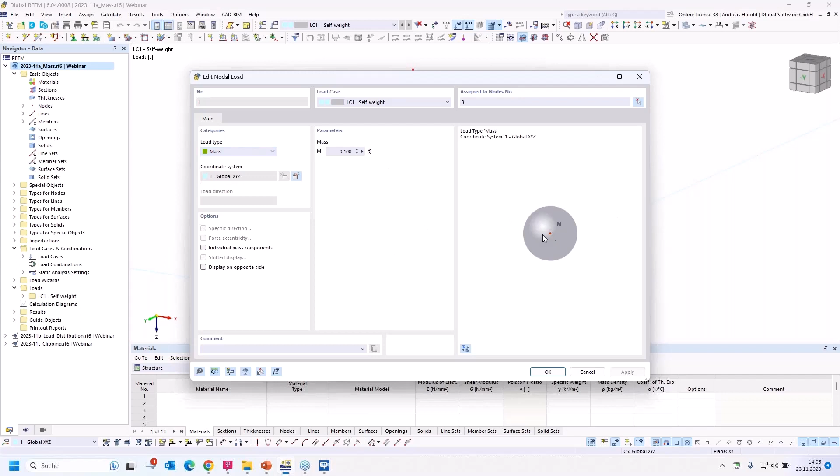Okay, I prepared that model with a rigid column and the mass load. The rigid beam hasn't got any load, as most of you know, and mass is a category of a load type. Usually you use force, but for example for a dynamic analysis, the mass load type is often used. If I click to the results, you can see there is no support reaction.

In the navigator results, you can see it's checked on, and you can also see there are no loads. In the table, if I go to static analysis, there are no support forces. How can you solve that?

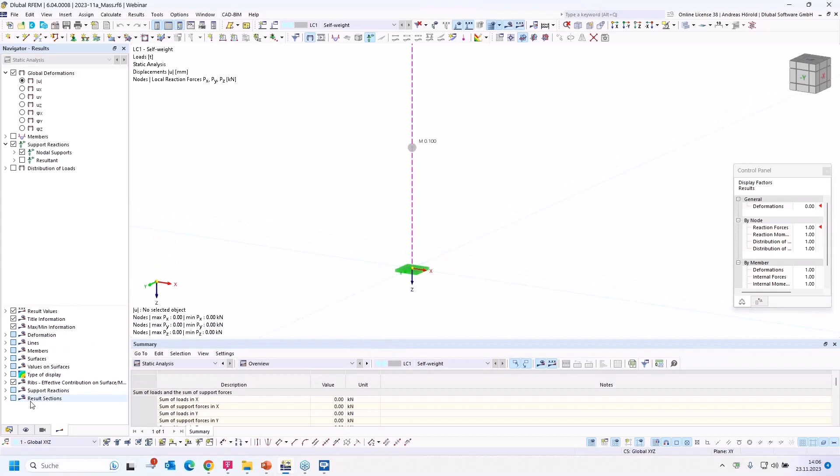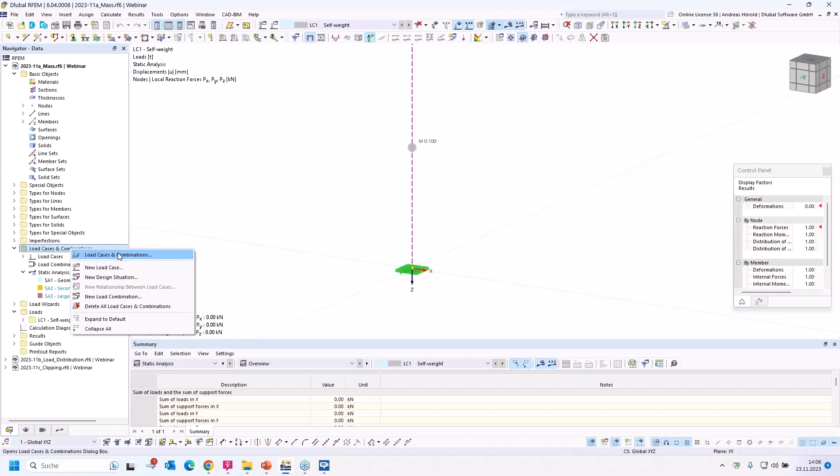You need to go left at the bottom. I switch to the navigator data, and I need to open the static analysis settings. Either you click with the right mouse and click edit, or you can also find it under load cases and combinations, also with right click. Then you see in the load cases the static analysis settings.

That's the same topic. If you click the edit button, you turn to this sub-dialog, and in the basic settings, where is this check? If you activate the mass, the masses will be converted into loads, with that factor in Z direction, 1 times. You can also press this button to switch between the vector and the acceleration.

Now you can see the acceleration of 10 meters per square second. The usual acceleration due to gravity is 9.81, and that value is rounded up by the program.

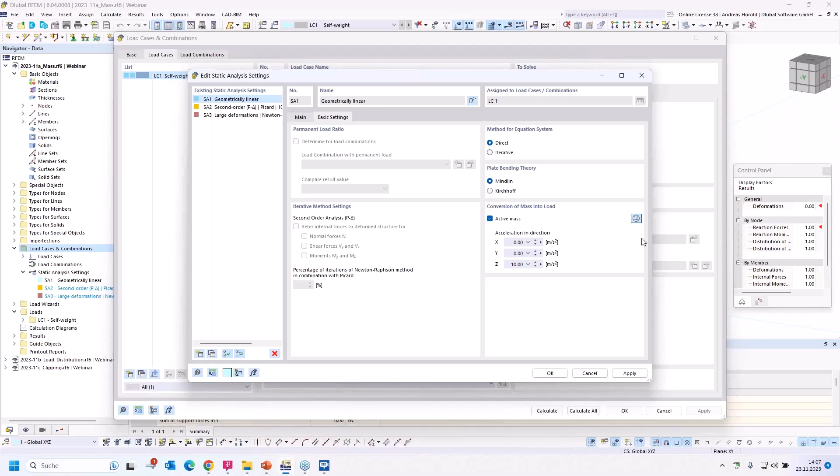Okay, now it's activated. I can click OK and calculate the self-weight load case, and now we should see a support reaction. Okay, now you can see it: 0.1 tons is 1 kilonewton. Okay, that was the first hint and the first question.

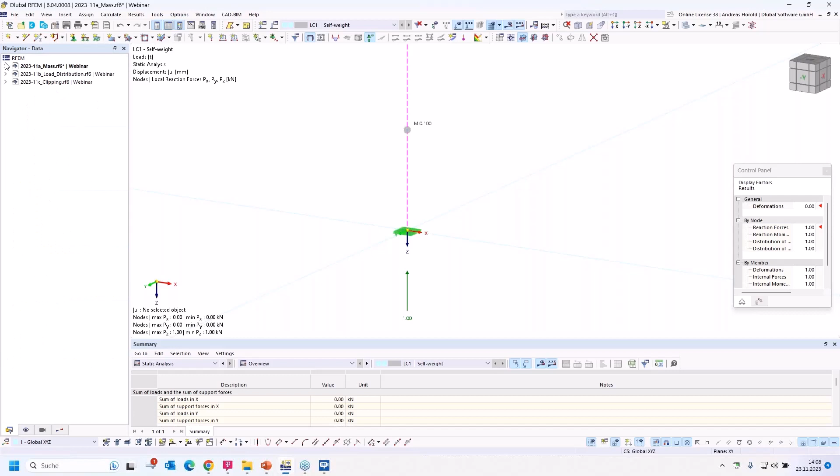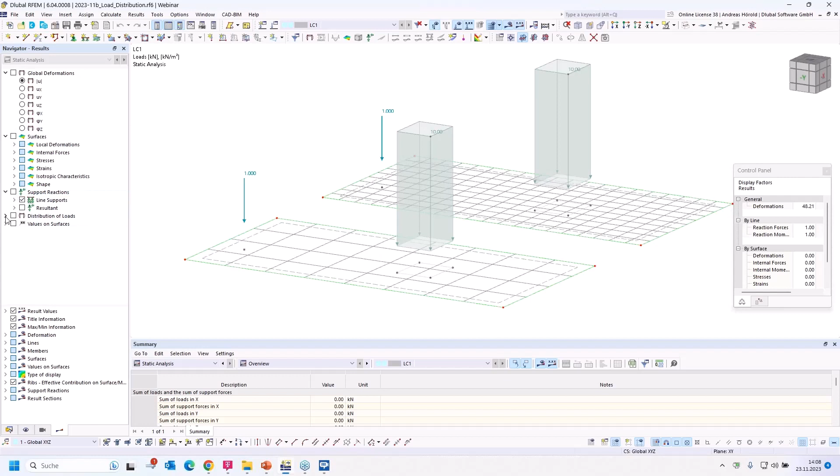I turn to the next model and the next question: how can I display the load distribution in the results of the static analysis? You can see that in the navigator results, left at the bottom, where is this check for distribution of loads. If I check this, you can see the load distribution.

The load distribution represents the load that is actually applied on the structural system at the FE mesh points, and if applicable on the FE areas. The FE mesh size plays an important role. You can see there are two models that are equal, and also the loads are equal, but there are two different FE mesh sizes. I can show that when I go above to mesh settings.

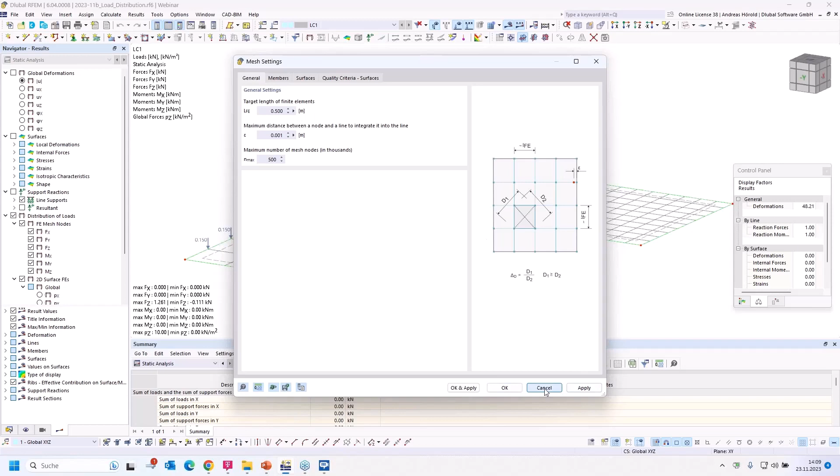That's the standard mesh setting, 50 centimeters. That's this surface, and if I click on it, you can see I've defined a mesh refinement. If I switch to that dialog, you can see the mesh refinement, 0.2 meters, 20 centimeters.

You can see in the different models and the different load distributions that in this model, the load distribution area is larger. And sometimes that can have an influence on the results.

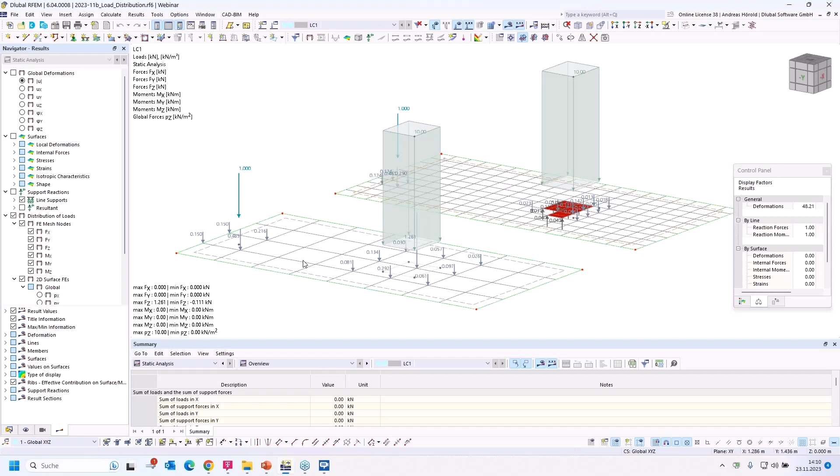Let me check the support reactions. I'll turn it a little bit. You can see there are different values, 0.74, 0.63, or if I rotate the model, the highest value, 0.7. This is 1.0.

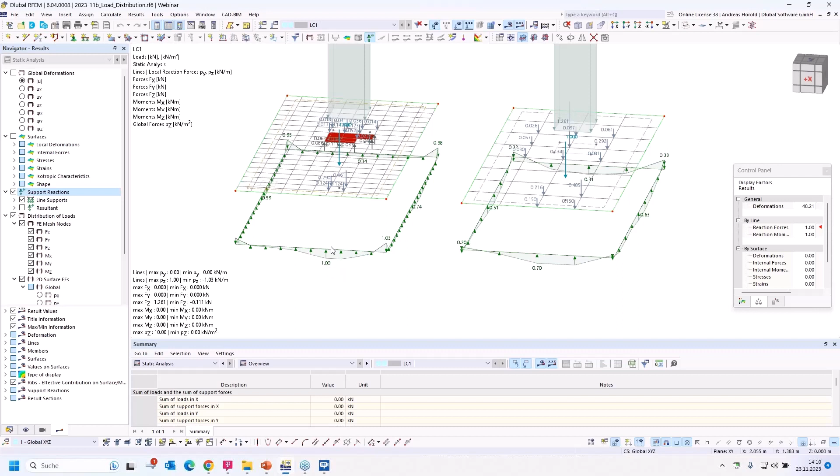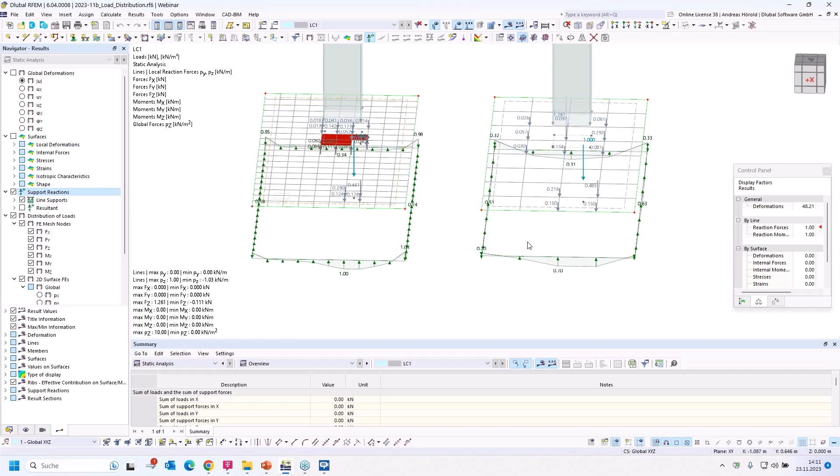The loads are not very high, that's why the difference is not too large, but that can really influence your results. Imagine there's a horizontal beam over an opening or something like that — the applying of the load should be correct.

Maybe you ask, what is the best FE mesh size? We can't say that. We can only say the FE mesh should be as large as possible, but as fine as necessary. There isn't any specific value that we can suggest.

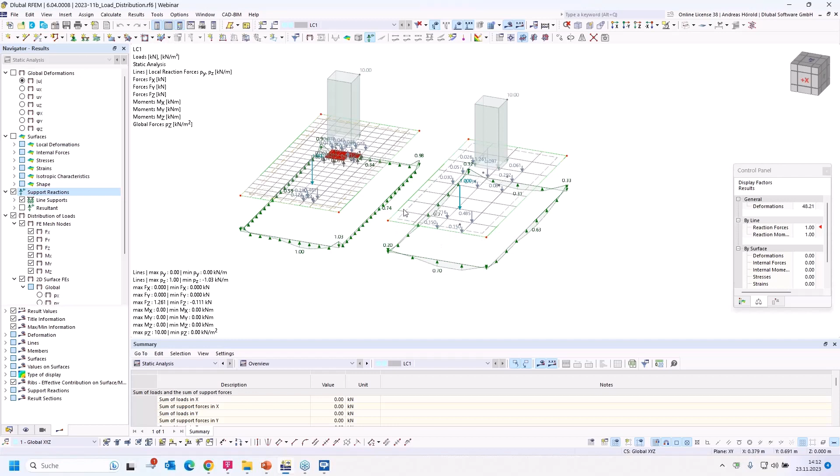When you have a surface load that loads the complete surface, you will see no difference or only a small difference in the results. But for examples like this, when you have a horizontal beam nearby, that can influence the results. You must test it. With that setting, you can display the distribution of loads and also the support reactions.

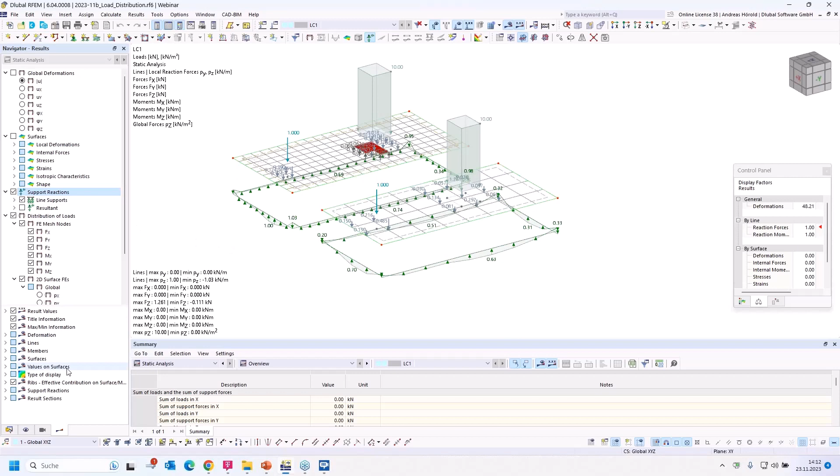Okay, then I turn to the next example, the next model and the next question. The question is: I have used a clipping plane in my model, and the hidden areas are still shown as transparent in the display. How can I completely hide them?

Let me switch on the guide objects, the clipping plane. You can see the clipping planes here. The default setting — I'll increase it a little bit — gives you three areas as default. They are created by default and you only need to activate them.

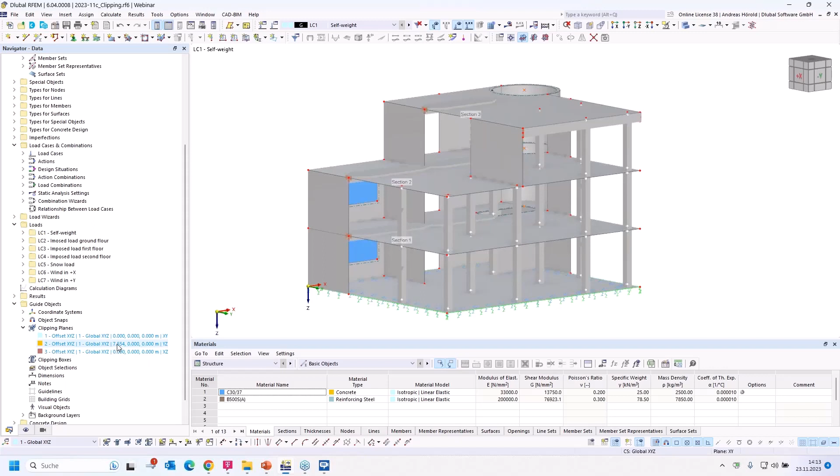Let me turn on a clipping plane. You can move the clipping plane. And you can see there is a transparent area. The question was, how can we completely hide this?

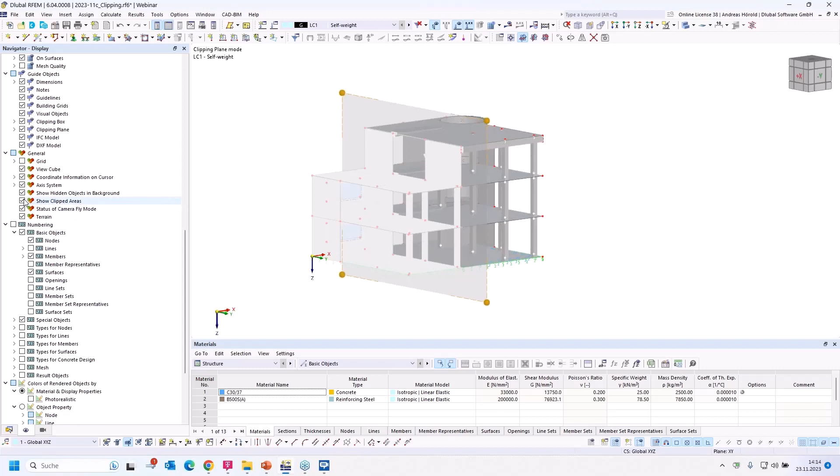We turn to the navigator display here at the bottom, then in the general settings, there's this checkbox, 'show clipped areas'. When I switch it off, you can take a look at the model, and that's quite better if you want.

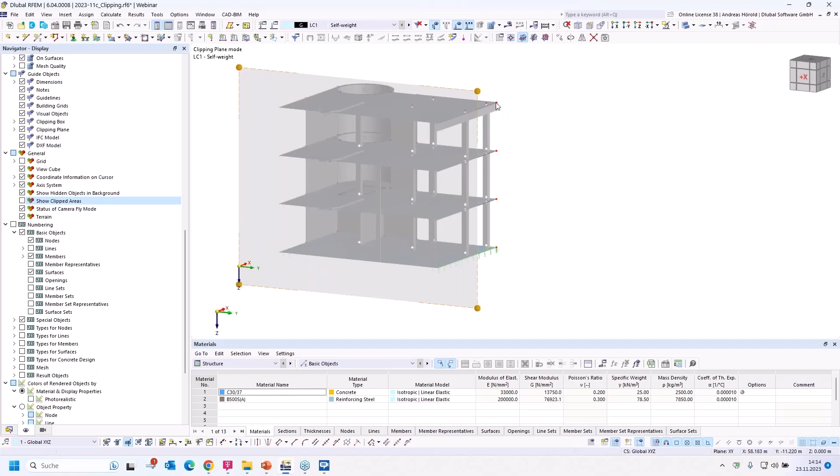That's the difference. If you want to modify this area of the clipping plane, you can right-click on this edge, for example, and turn to the display properties. I'll move it a little bit on this side, and you can change that value, for example 0.1, apply, and you can see the difference, 0.9, apply. Okay.

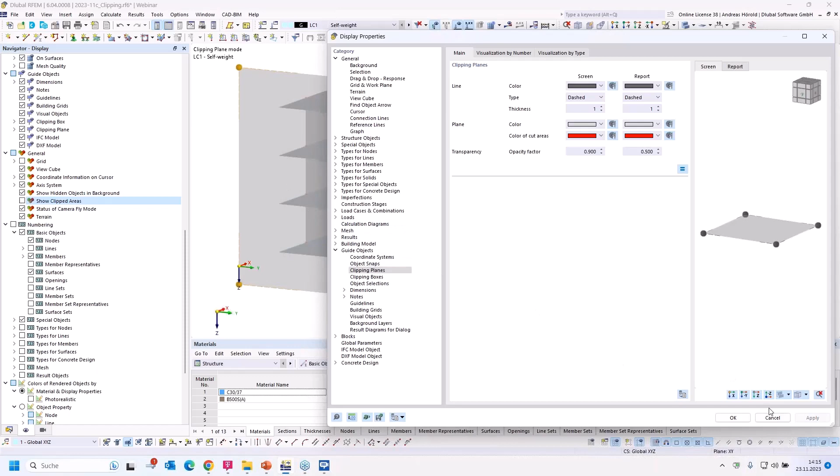There's another feature, 'show hidden objects in background', and it's not the same feature as 'show clipped areas'. When you select one column, then hide selected objects, you can see they appear gray. If you want to hide them completely, just uncheck this option.

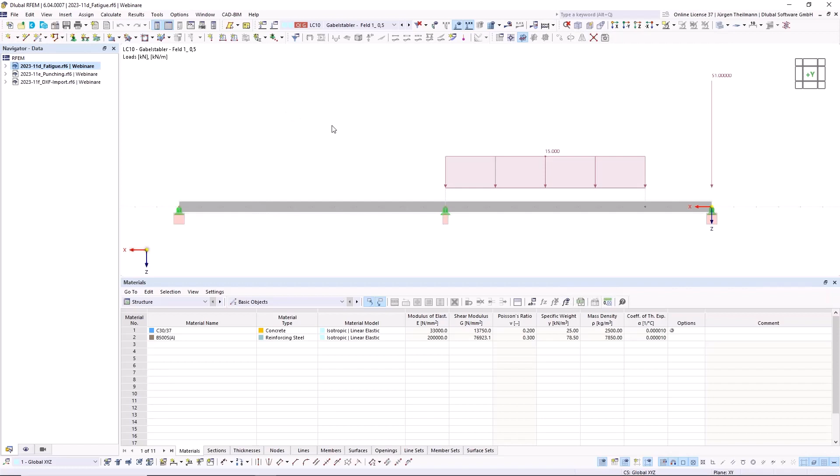This is a simple model — let me collapse the tables a bit so you can see it. This is a member model, but you can also perform the fatigue design on surface models. This is a kind of traffic route, a ceiling in, let's say, some kind of factory where you have traffic from forklifts driving around. You can see in the load cases that this is a kind of moving load from a forklift which is driving along this member right now.

This leads me to the next question: where do I need the fatigue design? It's mainly developed for bridge design, but as I said, other traffic routes, and maybe rainwater basins with traffic around. Generally, fatigue design is needed for structures where you have a lot of load alternations with load cycles of 1 million or more. Then you may need to perform this fatigue design check.

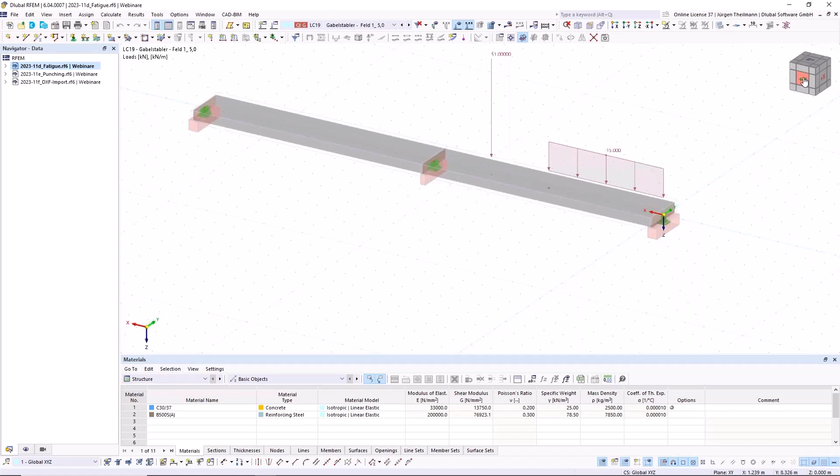So what do you need to do this? I'll expand my table a bit to show you in the concrete design add-on how you can switch on this fatigue design. First, there's a button with an earth globe and a small cogwheel - this is for the global settings of our add-on. In the ultimate design configurations, you can activate the fatigue design, which is the first thing you need to do.

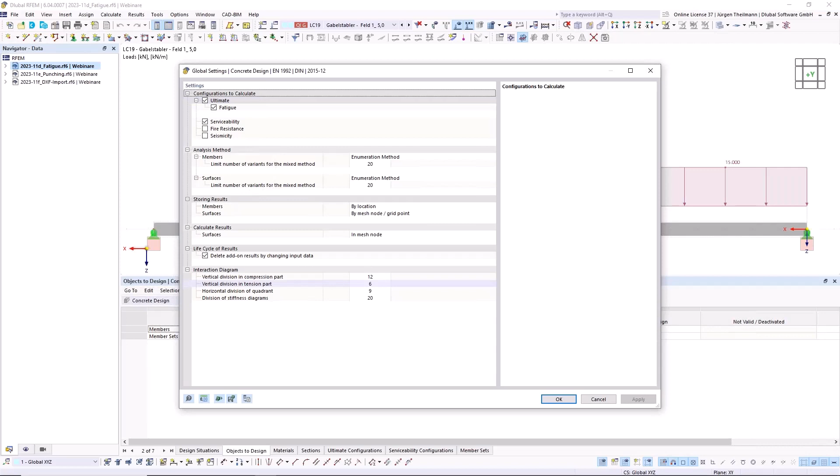Then I say OK, and now I go to the ultimate configurations. There you have a new tab for fatigue. In RFEM, you're now able to perform two ways for fatigue design: level 1 and level 2 from Eurocode. Level 1 is a simplified method. Level 2, as you can read, is for damage of equivalent stress range, and you can make some modifications there too.

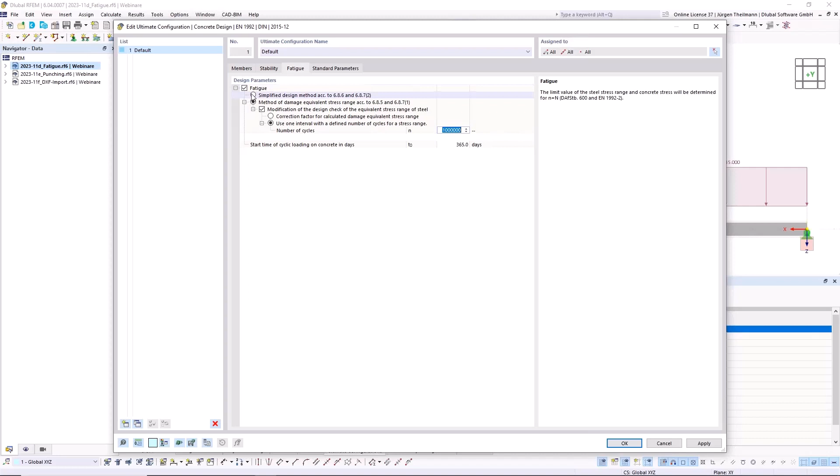I click that - you can use a correction factor lambda s, which is from bridge building. If you're from bridge building in your daily work, you know what this means and can edit it accordingly. Otherwise, you can use an interval of a defined number of cycles for your load alternations, which is set to 1 million by standard, but you can edit another value as needed for your project.

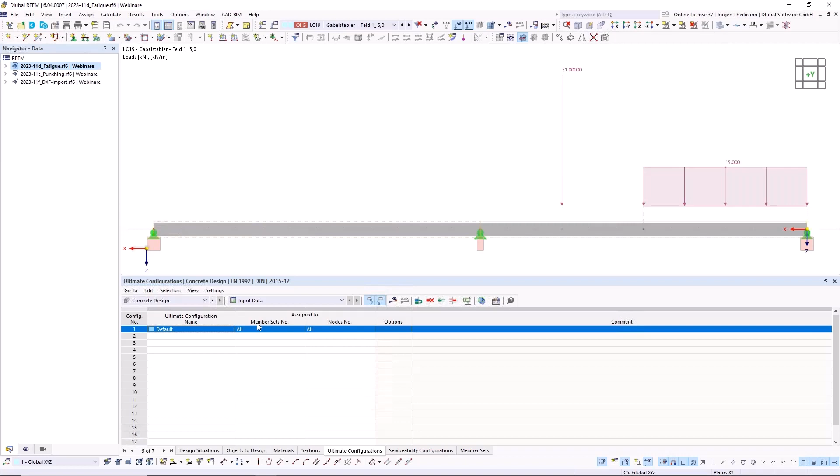So I switch this back to the level 1 design and switch off this setting. That's the second thing to consider. The third thing is, because we're dealing with load alternations, you need a design situation where you have these alternations in it - that's why it's best to have at least one result combination in your loads. So I go to the top where I have my load cases and open the dialog for my load cases and combinations.

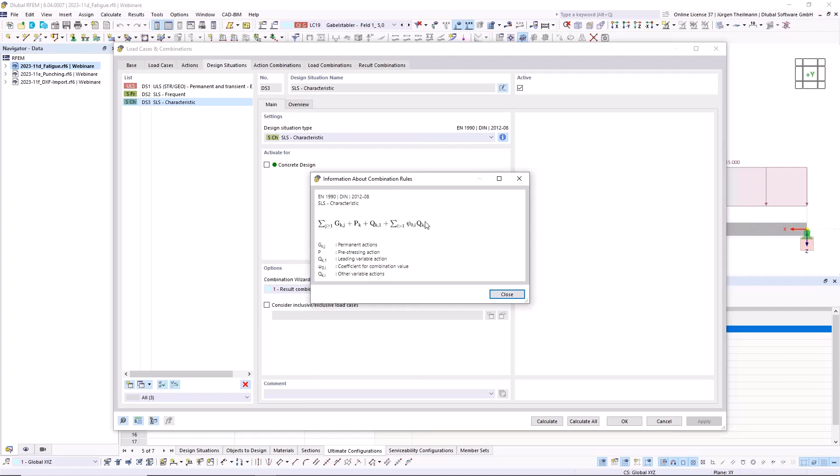Now I have 3 design situations in this model. First is the normal ULS design situation. Then I have the serviceability check frequent - this is for my level 1 fatigue design. For the level 2 fatigue design, we would need another design situation with other factors considered. Our development is right now working on bringing this design situation type into the program.

Unfortunately it's not 100% ready now, but that's not a problem - you can always build your result combinations manually. In our example today, it's sufficient that I use the SLS characteristic for our level 2, but this is just for this example.

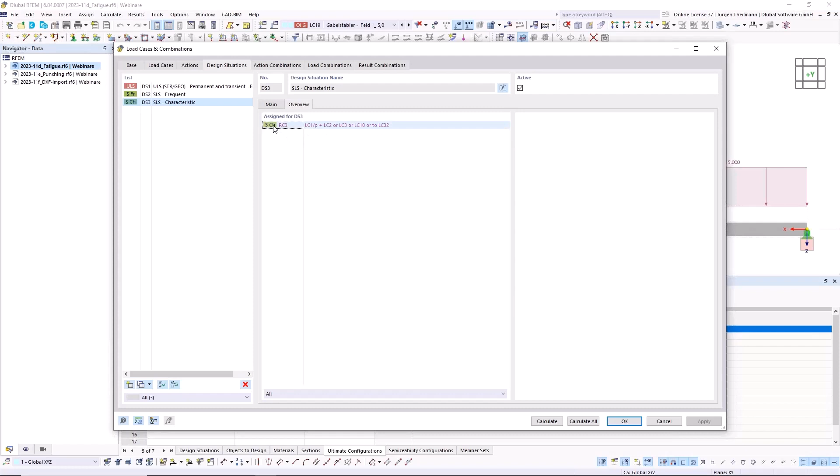Later on, you'll find the matching design situation type for that level 2 fatigue design check here. When I go to the overview of my design situations, you can see right now that I have result combination 3 for my level 2 fatigue design and result combination 2 for my level 1 fatigue design.

Okay, let's go back to OK. I go into the table for design situation, and now you could easily say, okay, I calculate all my design situations, but I just want to show you - right now we're doing level 1 and then we're doing level 2. It wouldn't make a difference to have both activated because the program will only perform the fatigue design according to the level we chose in our ultimate configurations.

Now I deactivate this DS3 once again, and I'll show you the level 1. I'll add a comment so there's no confusion. For the level 1 design check, we have the basic design situation type SLS frequent, and now we need to change this to the ULS fatigue non-cyclic. So that's the one we need for level 1.

I start the calculation, and you can now see that the program is running all the load cases simultaneously, all at once. And now it's performing the concrete design.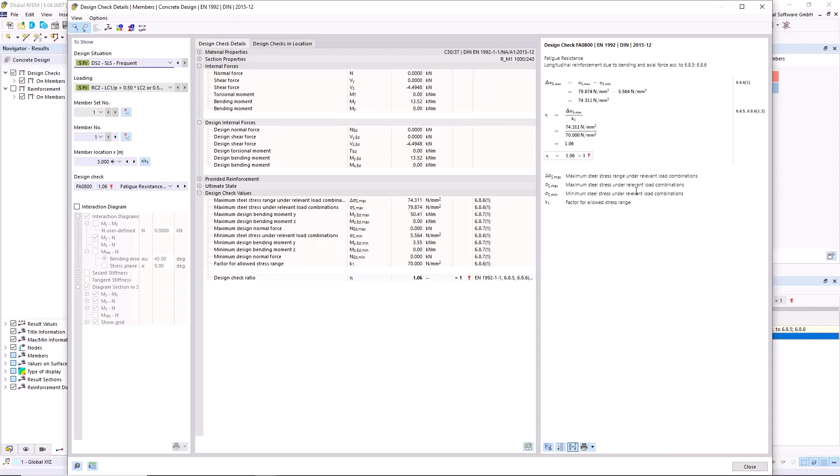Another thing I want to show you, now we have a factor of 1.06. It's almost fulfilled, but not entirely. I have done the result combination for the level 2 design check, and this is why I will show this to you.

Go back to my input data. I deactivate this design situation and activate the other one for level 2. Like I said before, if I calculate now, there will be no fatigue design check performed because I still have to activate level 2 in the ultimate configurations. So that's what I do now. Say OK and calculate again.

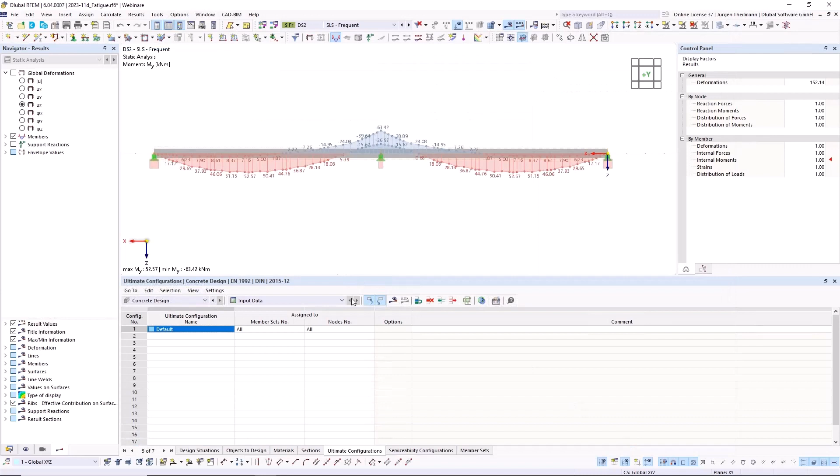You see all the load cases are still calculated. The program starts with the concrete design check. Now you see, we have invested a little bit more of computational power, and now we're a little bit better for our fatigue resistance. Still not fulfilled, but as I said, that's up to you. That's the work you will have to do further on.

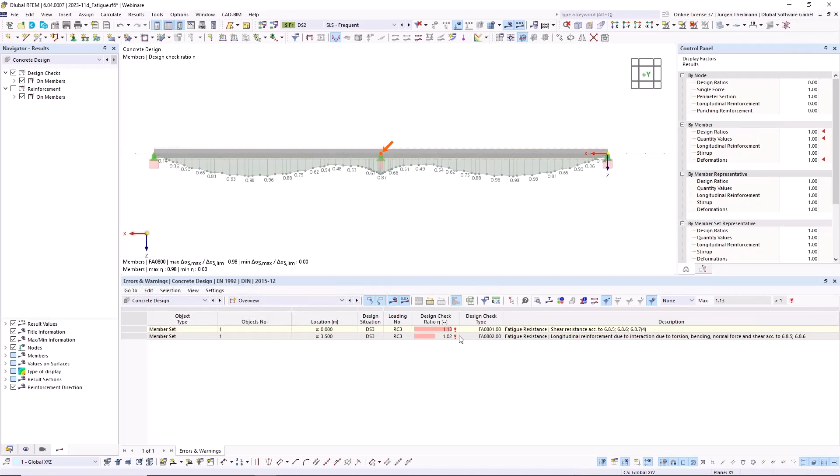As a summary, this has been a lot of information right now. We have 4 points we need to consider. First is in our global settings for the add-on, we have to activate the fatigue design. Second, in the ultimate configurations, we have to choose the level of design check we want to perform. Third, we need the correct design situation and change to it for fatigue. And the fourth point is that in those design situations, we need at least one result combination.

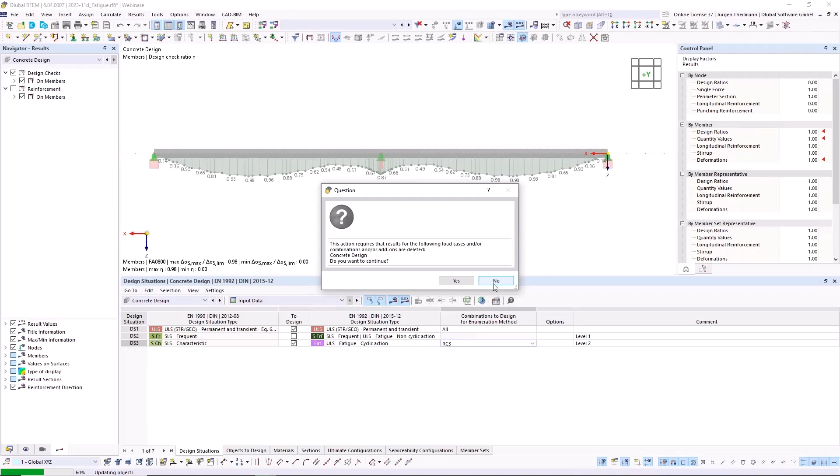If you need further information on this fatigue design, I will jump to our website because there's a very good technical article. You go to www.dlubal.com. You hover over support and learning with your mouse, and then you go down to support and knowledge base. Now, because it's our newest one, you can see the fatigue design according to Eurocode 2 in RFEM 6.

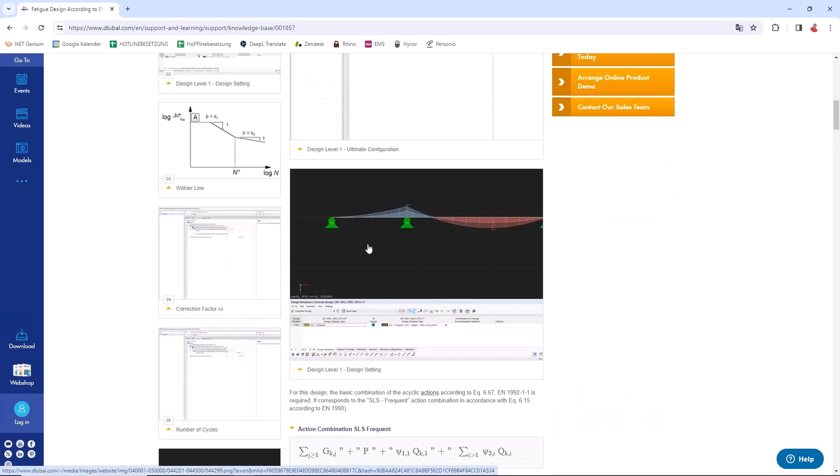As we go further on, there will be newer articles coming out every week. So you can go to full text and search for fatigue, and then you will find this technical article. If it was a bit too much for right now to get into your head, you can always go back here to our knowledge base and read all the details about this fatigue design checks.

Good, that's all for our fourth question today.

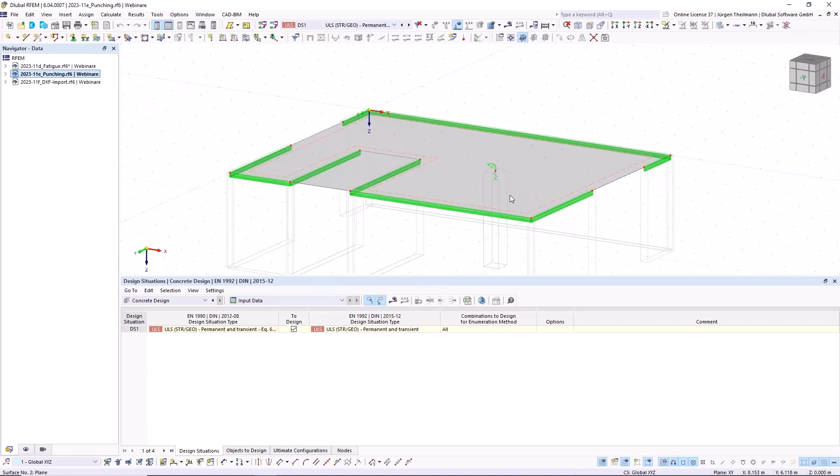And now I have the fifth one, which is a very general question about punching design, which says: I have a reinforced concrete plate or slab which has several nodes for the punching design. Some of them are wall ends. However, the program doesn't carry out the punching design check for all of those nodes. What is the reason for this? So I have a small model here.

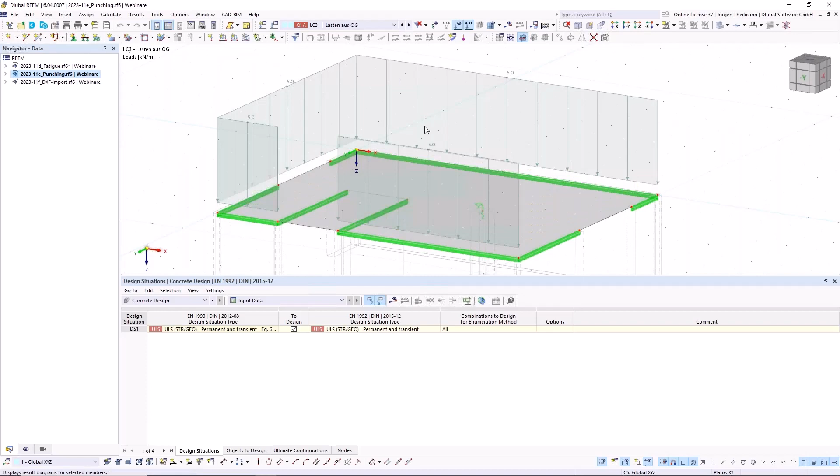You can see it's a bit of a ceiling. We have load cases for our imposed loads on that ceiling and from the levels above, and we have different load combinations within. I just restricted myself to the ULS design situation here. So now I want to perform the concrete design on this and just start the calculation.

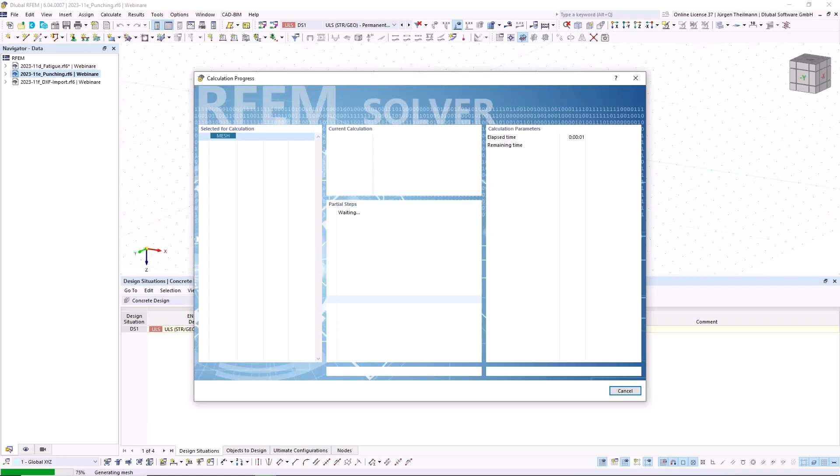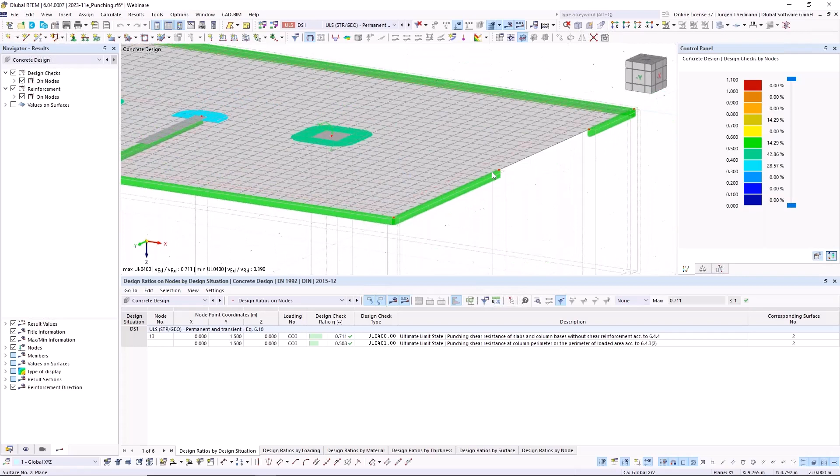Okay, you can now see I have visualized my punching design checks here and here and here, but suddenly on the right side there's no punching design fulfilled. I turn the model around. You can see this is very similar to the left one. Here's the right one, and you can see that the wall end is not considered by the program, and therefore there is no punching design. I also have no error message whatsoever, and well, that's what we usually get in support.

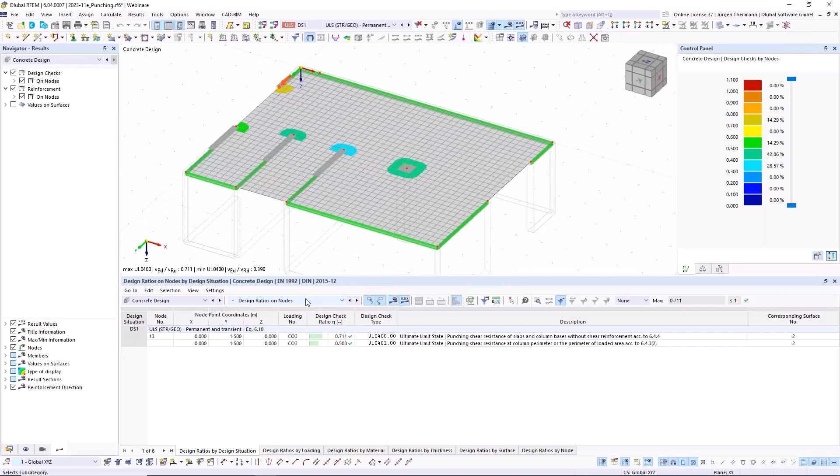So there are some methods now to approach this. First of all, I check the results and I see there is no error message. Normally, if you get an error message, you get a text saying something is missing, something needs to be activated, wrong material, whatever. This is not the case in this model now.

So now I go back to my input data. I check the design situation is active. I check the objects to design. Usually you can just uncheck design all and select the nodes for design by hand. So maybe the nodes of interest are just not selected.

So I now select these two nodes where I think something's wrong, and I just want to check their design. I also get no message for removed or not valid, so these nodes should be valid for my punching design.

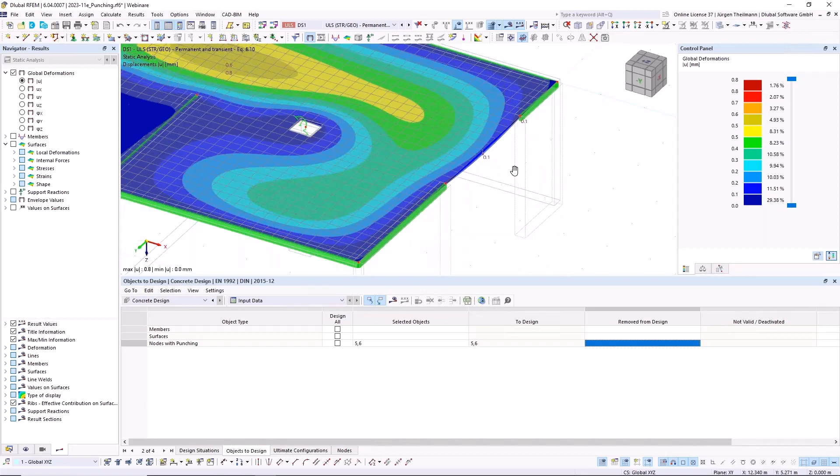I also check my line supports, so you can see what I have defined here. I have also visualized them to represent those fictitious walls for the stiffness of these line supports.

Just open them to see what's going on here. This stiffness via fictitious wall is edited here. And by the way, another question asked many times is why am I not able to choose this option, stiffness via fictitious wall?

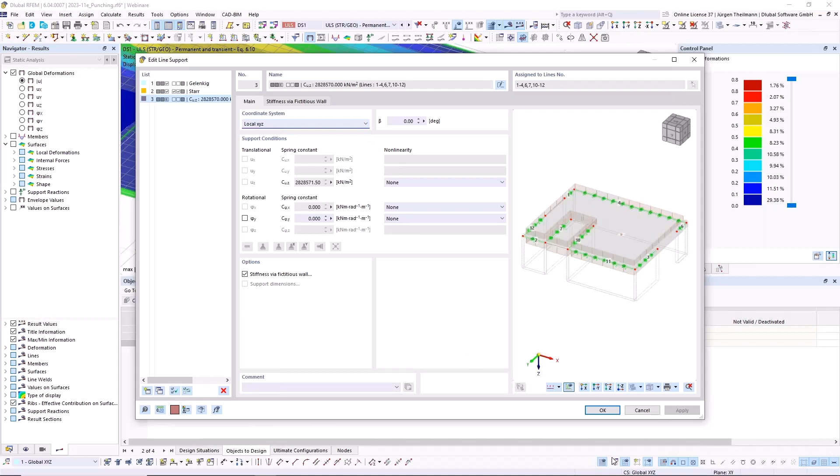That's because of the coordinate system you choose for your line support. By default, this is set to global, and then you cannot choose this fictitious wall option. So if you want to choose this option, you need the line support orientated to the local line axis system. But that's another question I have answered here.

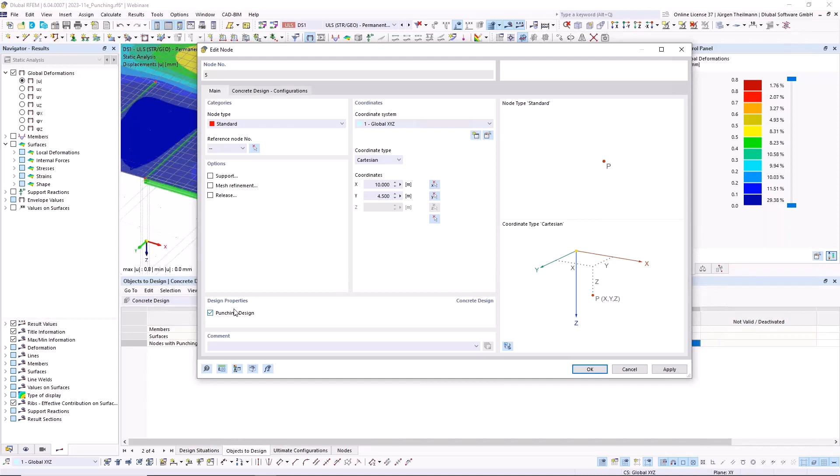That brings me back to our nodes for the punching design. Let's go to the nodes themselves, because it can easily be that you haven't activated them within the nodes themselves. This check must be set so the node can have ultimate configuration assigned to it. Otherwise, there would be no punching design performed. But that's also not the case in this model.

And that's for the settings for the add-on, but still no punching design for these two nodes. I go to my navigator views to see if maybe there's some self-defined view I've generated, but no, all is active.

You can also go to the top bar. There's this microscope symbol, and say cancel visibility mode, but these are all canceled, all should be visible. Now there's a third option. When I go to my navigator display, right now you see, oh, members are not active. Okay, this could be the case.

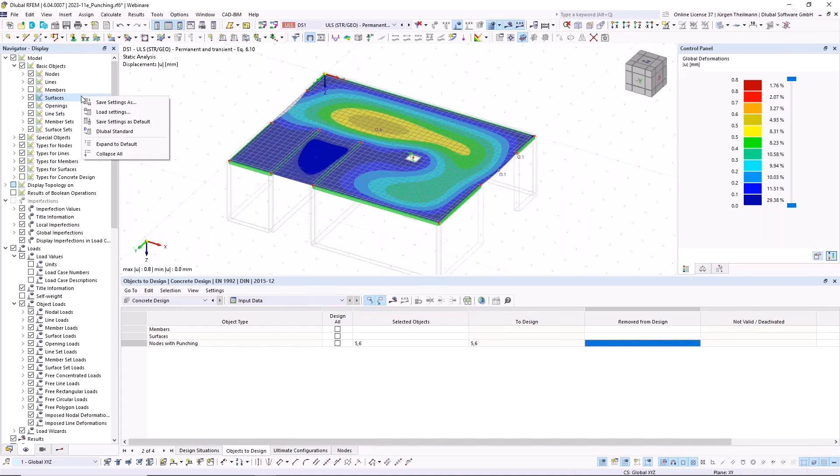Well, since I mentioned it now, you know that this is the case in this model. And another tip, if this is not the case and it's not so easy to spot, you can always do a right click on that navigator display and set all your display settings to Dlubal standard. And then the members will get activated as well.

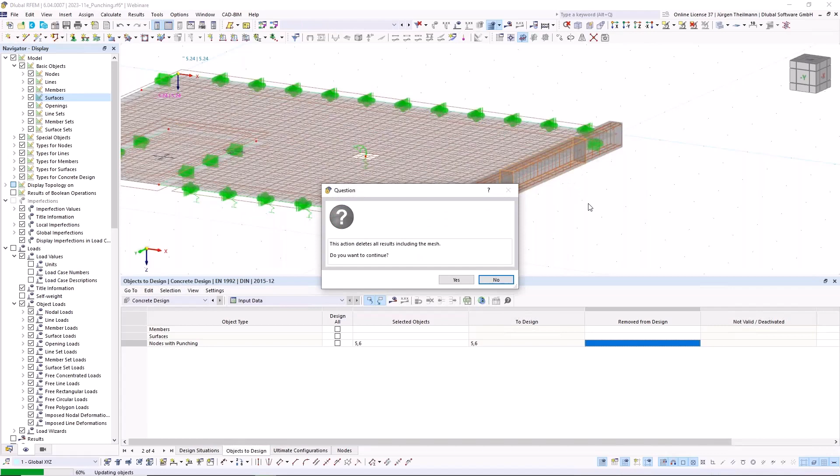And I zoom in and you will see, oh, there's a member going through at the corner of this slab, and this is now hindering me from performing the punching design. I just delete this member out, so maybe this has been forgotten to delete, or maybe it's there and then you actually don't have a node for punching. I just delete this middle part and start the calculation.

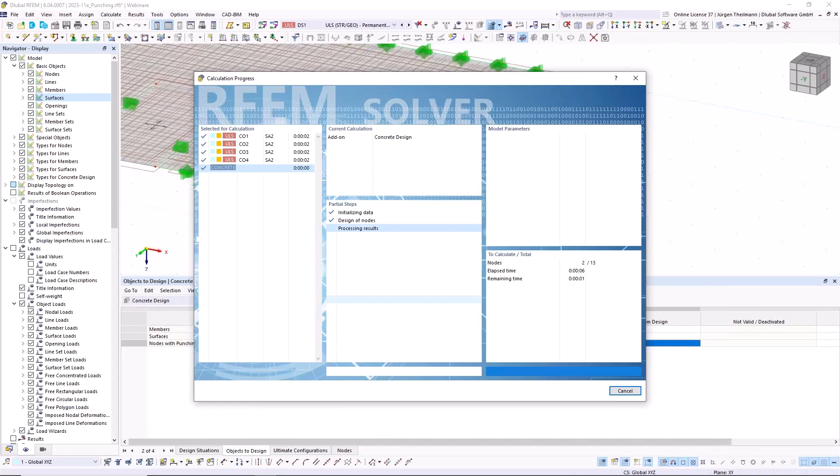And now you will see for my two nodes I have selected, the punching design is now fulfilled. Now they are recognized as wall ends.

For the foreseeable future, there will be a design check coming that will give you a warning that the topology of these chosen nodes is not valid for a punching design. But at the moment, you will have to use the few hints I've given you to search for possible causes that the punching design is not performed.

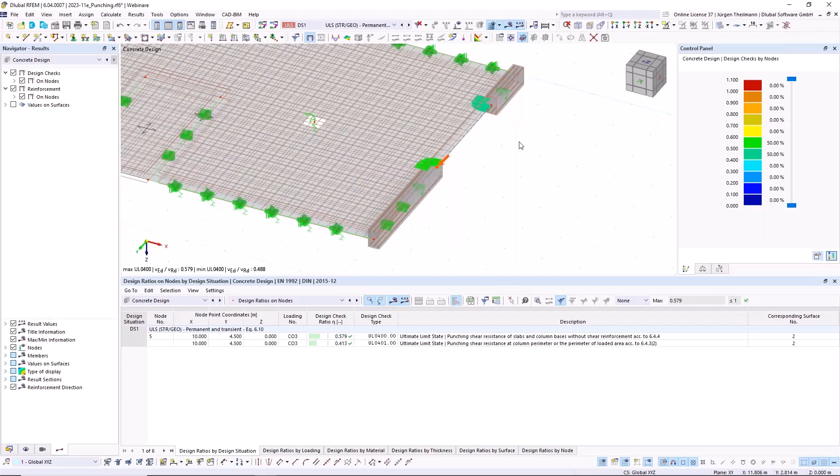Good, let's go to our last question of the day. I go to this model, and this is asked really, really often because many of you, especially when building multi-story buildings, you're working with DXF files as background layers. And there's always the question, how can I move them? How can I align my stories correctly?

And here I have a small multi-story building. So I have 4 background layers inserted here. And what I intended was to have this, when you follow my mouse pointer, to have this wall be on top of each other in all stories of my building.

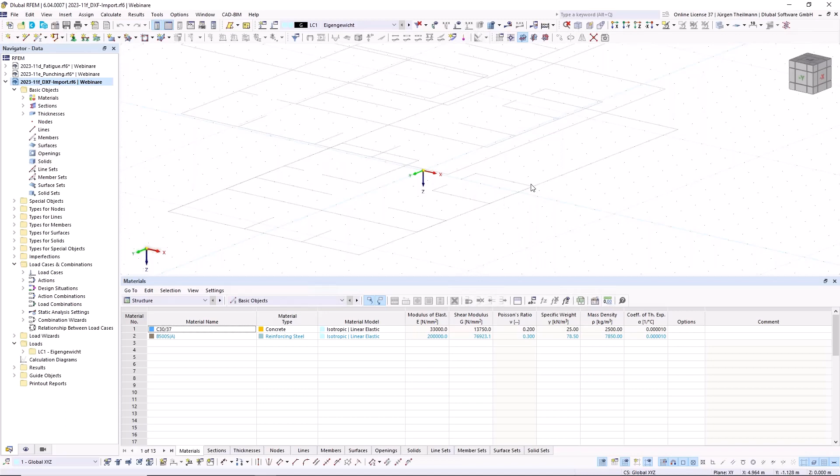But when I look on it from the top, you can easily see, oh, I have got something wrong with implementing my background layers in the file. But that's not a problem. That is now easy to correct.

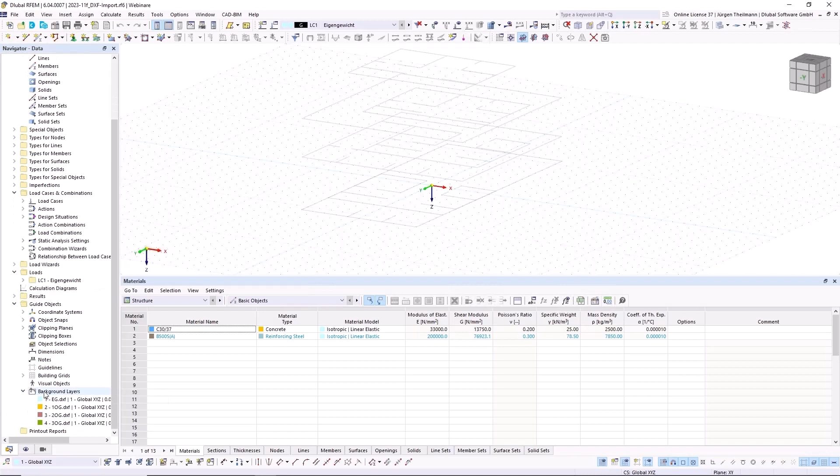I go to my navigator data, to the guide objects, and there we have our background layers. Usually you perform a right click and say new, but I go to edit because I already have them in here. We go to our first layer. You see it's at the origin of our global coordinate system. We have the DXF file, and we can choose an insert point.

This is by default set to center, which is the center of the whole DXF file itself. You can choose some other pre-selected insert points, and you can see that lower background layer switching around.

These are just predefined points defined by the outlines of your DXF file. Maybe, like in my case I want to present here, you have a certain reference point you want to use. Maybe it's aligned to a frame you have, or maybe to your building grid.

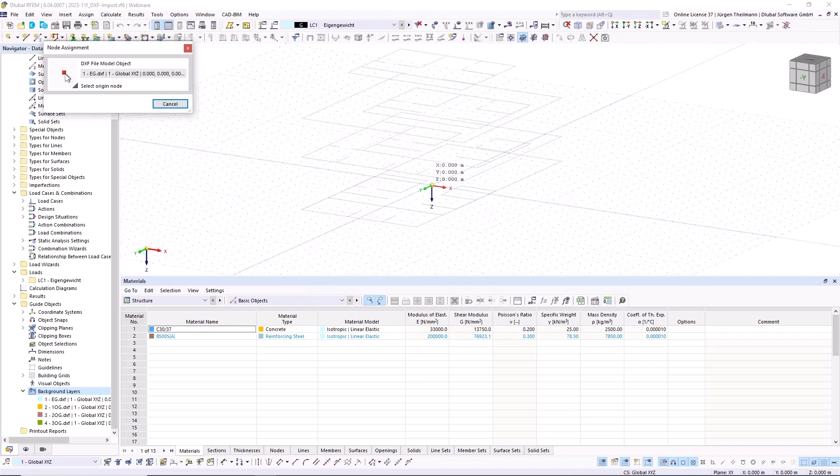So that's why I will show you how to select your insert point in the preview. That's done at this section here, at this origin point section. There are two pretty similar pointers right here for the picking. The left one is for where in my RFEM model will be the origin point, and the right one is for where in my DXF file will be the origin point.

So you see, I don't switch to RFEM, I'm still in this dialog for the background layers. And I can now pick my reference point I've chosen for this building, and hit apply. This is now a bit of a finger exercise.

Go to my second one, select in preview. You can see I have already assigned my origin point for the model, so it's 3 meters above. So I only have to choose my insert point within my background layer, go to the reference point, and hit apply.

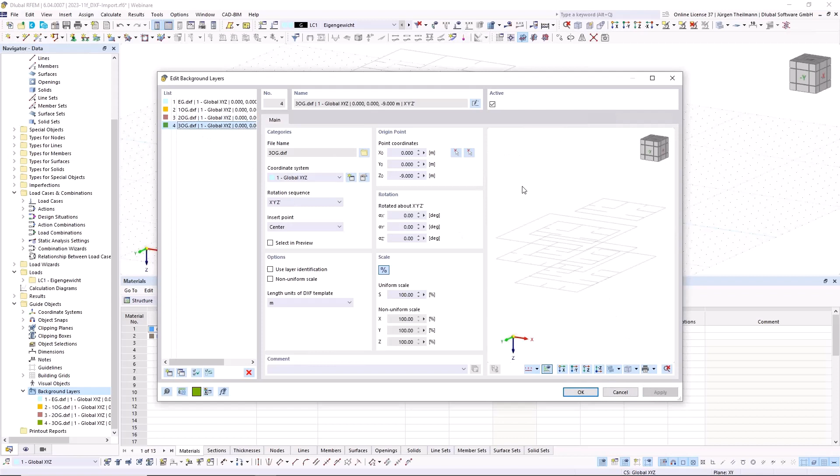Next one, select in preview. This now goes really fast once you've done it 2 or 3 times. Hit apply. And now for my top story. Hit OK. You can see the background layers are moved now.

If I look on the model from the top, using my view cube to do this, you see my background layers are now aligned in the correct way and all on top of each other, especially in my reference point. Some of our customers already know about this topic with the reference point, so maybe they use lines of their building grid as a reference point, or they simply add a small pointer where they say this is my reference point in every story, and use this to really get those background layers aligned.

Yes, that's all from my side. Thank you so much for now, and back to Andreas, I would say.

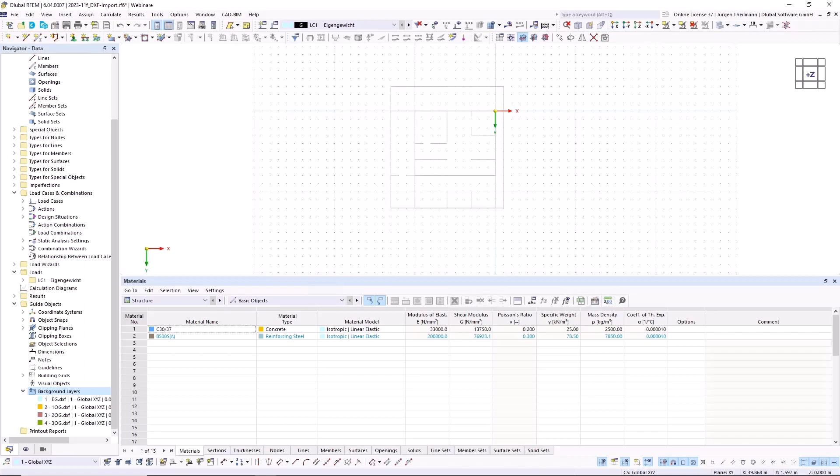Okay, thank you, Jürgen, for your questions or your answers. Thank you. Yeah, before I close the webinar and I show you the website where you can find the recording in the next days, just a small hint.